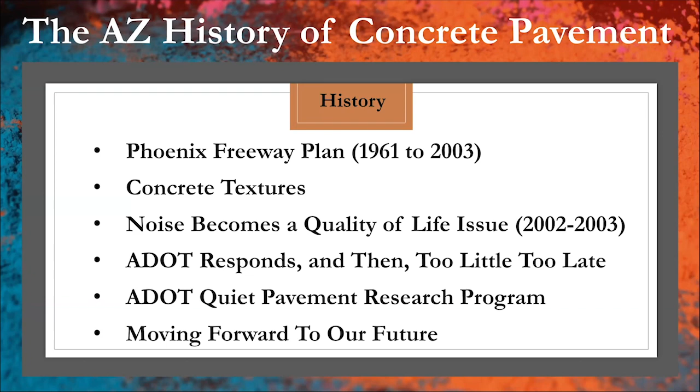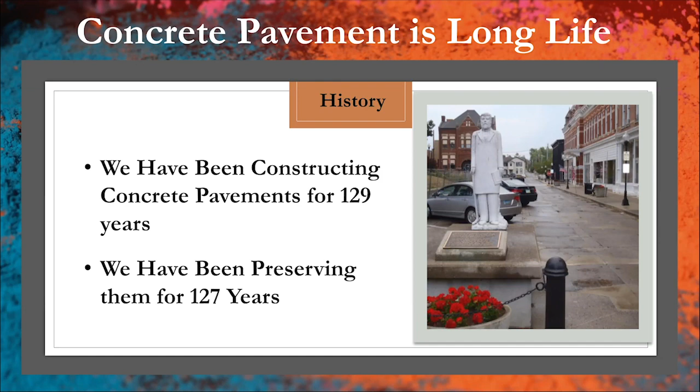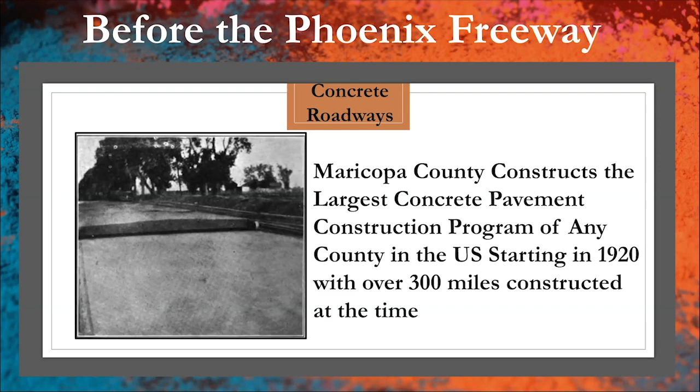Bringing it a little bit closer to home, this hopefully is useful for people to understand our roots. This isn't the Phoenix Freeway system, but Maricopa County started in 1920 with the biggest concrete pavement construction program in the United States. Everybody associates concrete pavement with the Midwest, but it was actually alive and well here in Arizona starting in 1920. Getting closer to the Phoenix Freeway system, this is a slide of the very beginning of it, and it was designed in concrete.

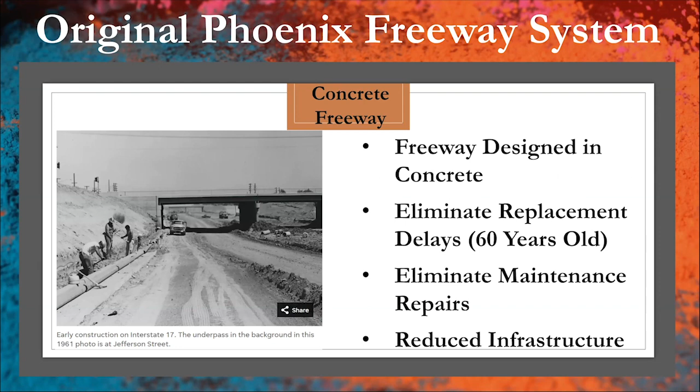The reason for that was to eliminate replacement delays from maintenance, and also to reduce infrastructure, because if you don't have to maintain it, you don't need as much maintenance facilities. The first section that went down that I'm aware of is from 1961, and it's still there. So again, I'm just echoing a little bit about the long life.

The concept is if you impose a signal that's 180 degrees out of phase, it'll cancel the sound. That's actually in modern vehicles today - the high-end vehicles have noise cancellation technology inside the automobile. Also interesting, this technology is coming back from Europe as an innovative technology. But like I said, ADOT first looked at it in 1972.

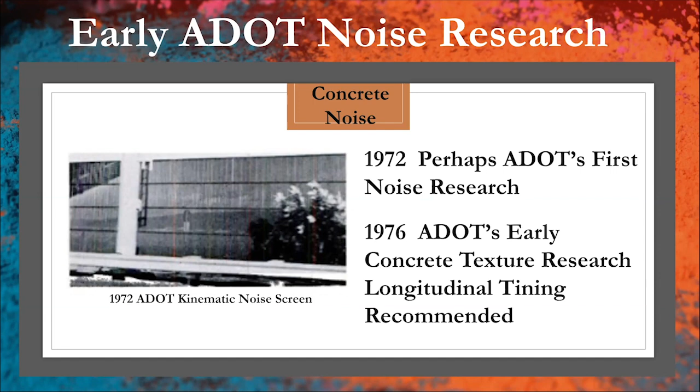The next project was up in the Flagstaff area, I believe on I-17 in 1976, and ADOT evaluated different concrete textures to see which was the best performing. The conclusion of that research was to use longitudinal tining. Unfortunately, that's not what ADOT continued doing - they continued going with transverse tining. What I'm going to show you now is some of the different diamond grinding textures.

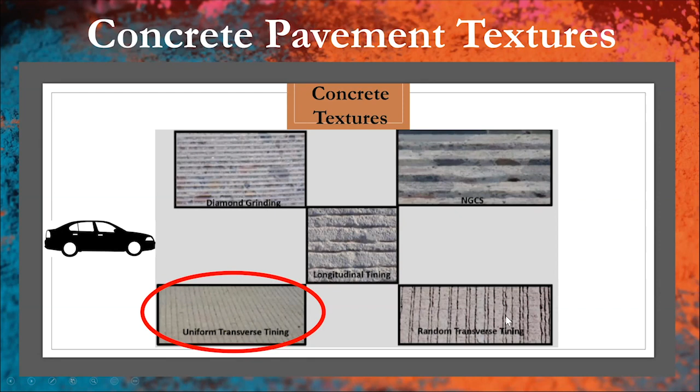This random transverse tining was developed by Marquette University about 2000, and from about 2000 to 2010 it was promoted as the quiet concrete pavement surface. This was a huge mistake. It ended up being the noisiest concrete texture, but at that time nobody realized that.

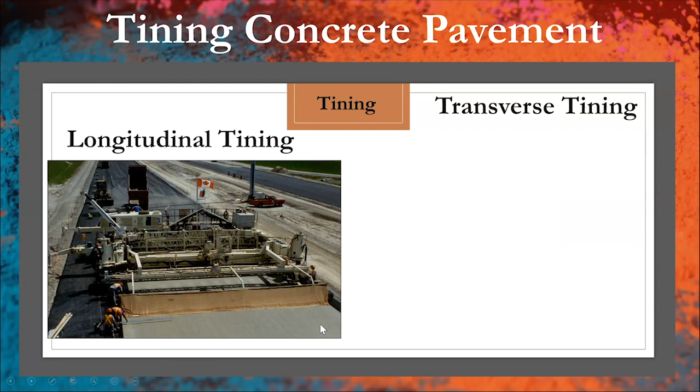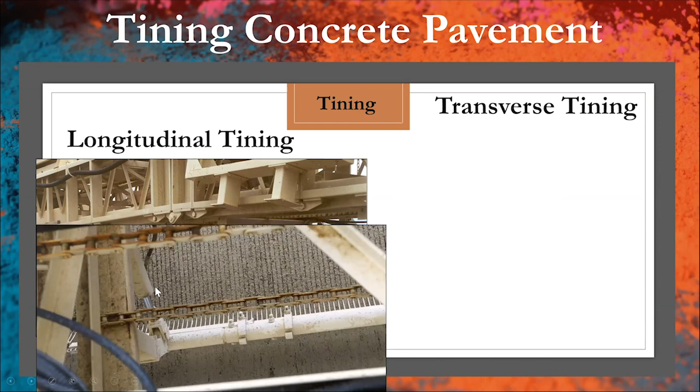So when we say tines, they really are. These are little metal tines, about 1/8 of an inch wide. I'll show you a little close-up of that so you can see each of the tines there. It's really just like taking a rake through the concrete mix. So that's when we say tining, that's really what we're talking about.

The only difference between transverse tining and longitudinal is transverse is 90 degrees to the direction of traffic. And quite frankly, that's what makes it evil. So we'll get into that a little bit more.

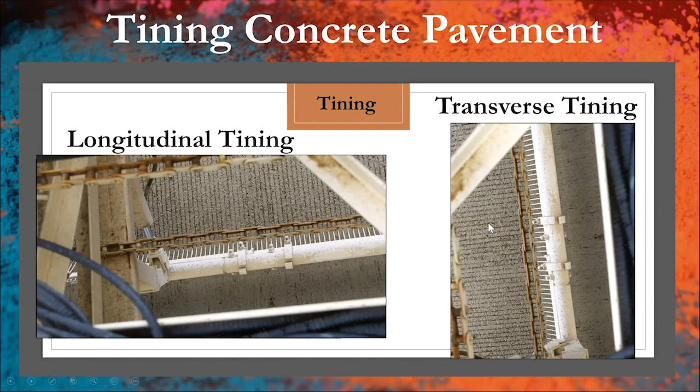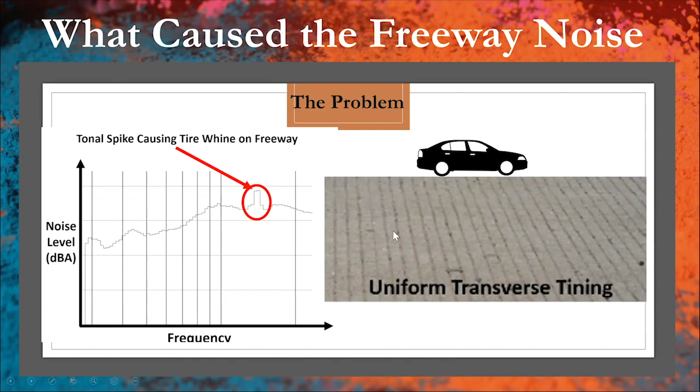This is the whine that you hear in the car that makes it where you can't hear your radio and disturbs you in the backyard. This is all a function of this transverse tining and the spacing and depth of the grooves.

And if you don't accept that, I'd encourage you to go to the internet and look up the Honda Musical Road. In 2008, the Honda Corporation wanted to do a commercial and they made a musical road. They went to Lancaster, California—notice this is an asphalt pavement, not a concrete pavement—but they cut grooves in the roadway. As you drive over this in a Honda Civic at 50 miles an hour, it plays the William Tell Overture or the Lone Ranger theme song. So you could do these grooves in any kind of pavement material and you'll get the same result. It is a function of the transverse grooves.

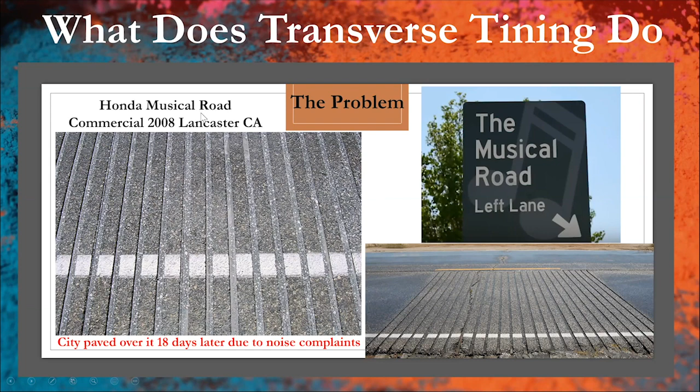Another interesting aspect: 18 days after they placed it, the city paved over it because of noise complaints. So the Honda Corporation had to move out to the boondocks where there were no abutting properties and recreate it for their commercial. You can go to the ad, there's a number of YouTubes on it. There's a married couple that actually does a very good one, and it really sounds like it should.

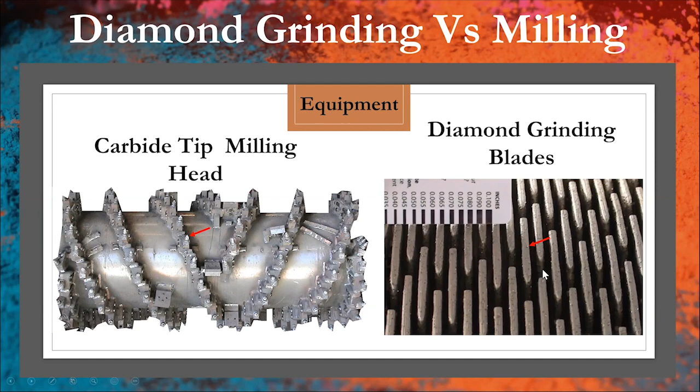So it actually grinds away the material as opposed to chipping it off, and that's the principal difference.

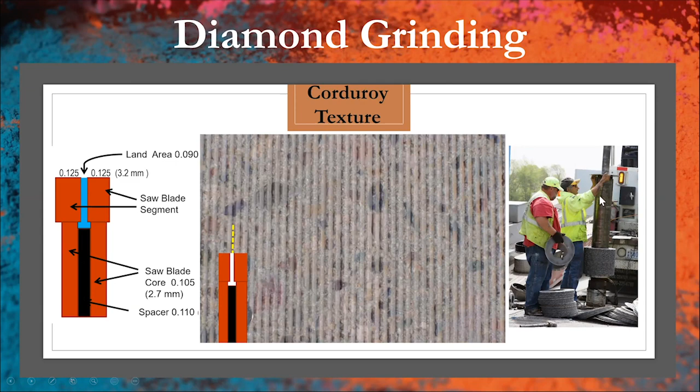But if I may take this same image and bring it back over the corduroy texture so you understand it, where you see these grooves, that's actually the blade. Where you see the ridges, that's a function of the spacer and how wide it is. And this is what a head looks like. They're stacking a cutting blade, a spacer, cutting blade, and that thing will weigh about 5,000 pounds when it's all done.

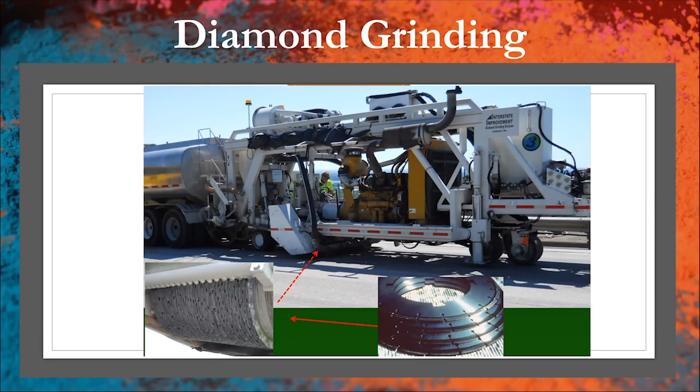So again, blade, spacer, stack it on a head. The head is mounted on the machine. This is a full surface roadway grinder, and you can see the head goes transverse to the direction of travel. It would be traveling to the right out of the page. Since most of the grinding in urban areas is done at night, people don't really get to see what one looks like, so I wanted to make sure you're aware of it.

Taking it back a little closer to home, so you understand what ADOT went through when the noise issue first started surfacing, I tried to give you a little bit of the history on the noise. But at the time, around vintage 2000, there was no standard in the US for how to measure tire pavement noise. Most noise measurements were done with wayside measurements alongside the roadway, but that collects not only tire pavement noise, but also engine noise, exhaust noise, and a lot of other noise. So there was no way to evaluate tire pavement noise. So ADOT actually had to develop equipment to do this, and I'll get into that.

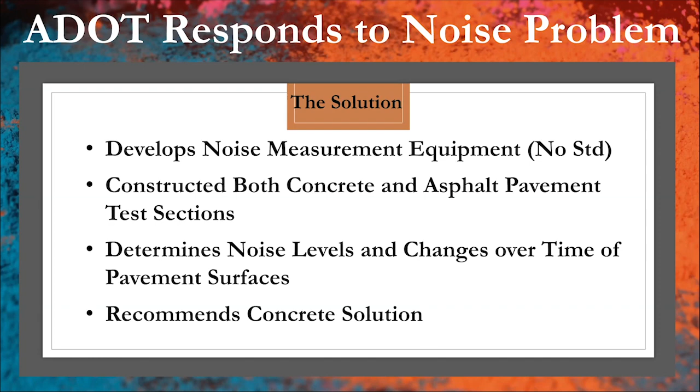They constructed both concrete and asphalt test sections to evaluate them. They determined the noise levels and changes over time for each of those pavement surfaces. After a couple of years, the recommendation was to do longitudinal tining for new construction, and conventional diamond grinding on the existing transverse tining. At that time, all the ongoing concrete projects had change orders initiated to convert from transverse tining to longitudinal tining.

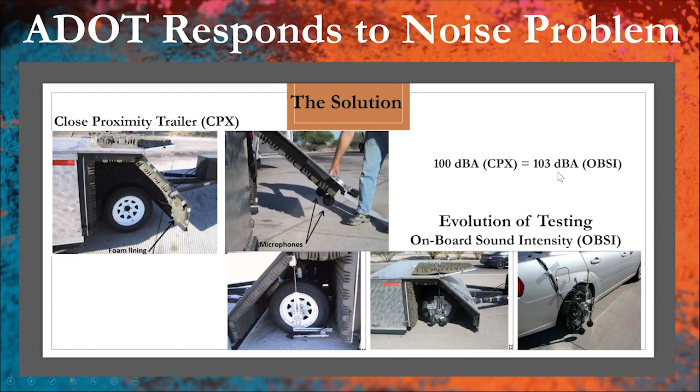So when you see values in the low 90s for noise measurements, it was taken with this device, which is the national standard. So when you're looking at noise measurements, you should be aware of it. Also notice these are much higher than what you would experience alongside the road because they're right down at the tire. Typically, there's about a 30 dB reduction getting to the wayside.

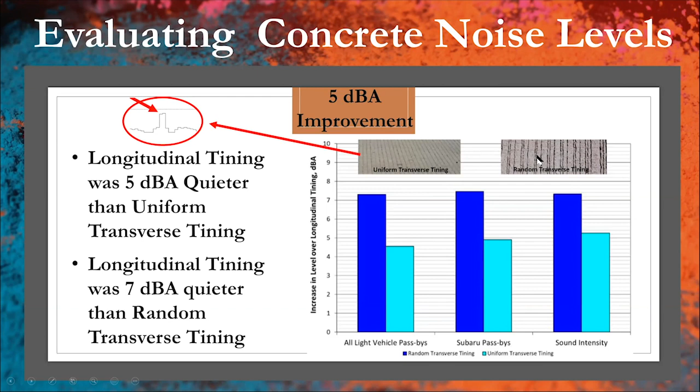The longitudinal tining came out to be the best solution. It was 5 decibels quieter than the transverse tining, and 7 decibels quieter than the random transverse tining. Neither the longitudinal tining nor the random transverse have this tonal spike, but the random transverse tining was still just too loud of a surface.

What you can see is that all the asphalt surfaces increase in noise level over time. The asphalt rubber still outperformed the others.

One of the things that was really important to know is how does that change over time? This is about vintage 2000, 2001. There were only 2 asphalt rubber sections on concrete to be evaluated, down on I-19 in Tucson. When ADOT places asphalt rubber on concrete, it's 1 inch thick, and when they place it on asphalt, it's half an inch thick.

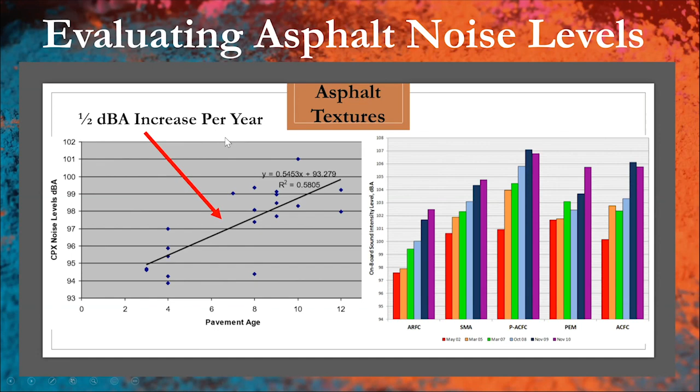So the only way you could generate data was to look in the pavement management system and develop a selection of projects in the same environment on flexible pavements, and all the testing was done on those. You can see it's a shotgun blast, and this is the regression that goes through it. But the important part learned from this exercise is that the asphalt rubber will increase 0.5 decibel per year. When we go over the quiet pavement results later on, remember this number.

So to compare what went on over about a 2 or 3 year period, ADOT created noise measurement equipment. They developed test sections in both asphalt and concrete, looked at the initial and long-term results as long as they could, and their engineering solution was to pick the longitudinal tining for new construction and diamond grinding for the existing surfaces. Unfortunately, it was too little too late. I mentioned we opened up the 3 miles of random transverse tining, and that happened right at the crescendo of the noise complaints and quality of life issues.

So the governor stepped in. Communities were in support of that because they were the ones on the front lines catching a lot of the grief on the noise issue complaints.

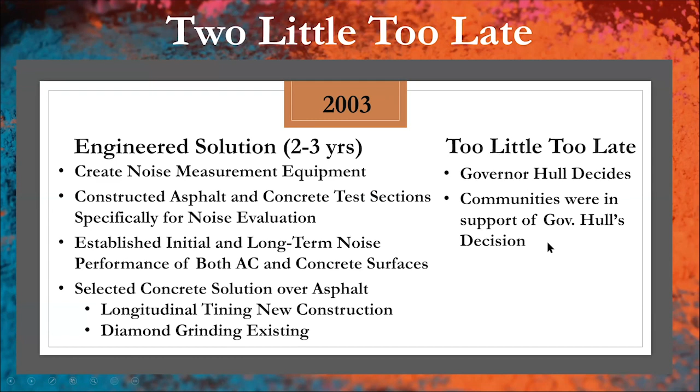So let's take a look at the quiet pavement program. It began in earnest around 2003. It was set up with 3 different types of measurements. There were 6 research locations that looked at both community noise and tire pavement noise. There was also collection done of tire pavement noise at every milepost, and another set that was just neighborhood testing - the idea being if it doesn't make much impact on the neighborhood, we don't really care what it is at tire pavement noise.

The plot on the right is showing the results out of the quiet pavement research program. The blue dots represent the existing uniform transverse tining - the average was about 105 decibels, but what you also see is quite a spread. These are milepost tests. If you were at this location down here as a homeowner, you probably wouldn't worry too much about the uniform transverse tining, but if you were up here, it was chasing you out of your car in your backyard.

The brown line down here shows what the asphalt rubber was at year 1 to 2. The reason it's shown as 1 to 2 is this timeline is in relationship to when the quiet pavement program started, not necessarily the age of the asphalt rubber product. So what you'll see is it's quite a bit lower.

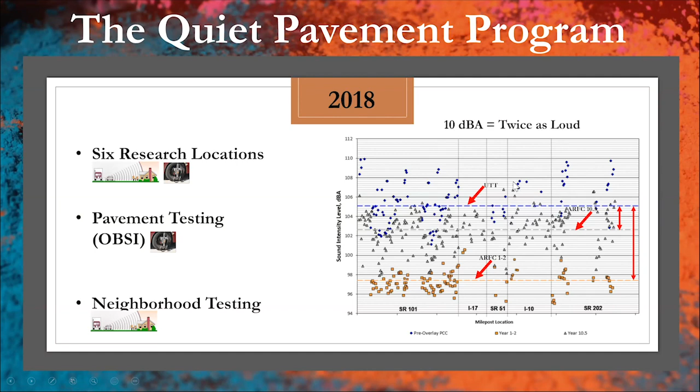There's about a 7 or 8 dB difference here. This also displays less scatter. Then at year 10.5 on the asphalt rubber, that's what the gray average is. So now you can see we're down to about 3 or 4 decibels. There were actually 2 sections that had already been replaced at this time. So again, there's a couple in here that are only 1 or 2 years old, not 10, which is why you're seeing so much scatter. But you can see some of the high points for the 10.5-year-old results are right up there, as loud as the uniform transverse tining.

One of the things I'm trying to relate back to the billion-dollar decision is the true cost of ownership, because that was really never done in that decision. So I've done it myself, and I'm going to present the results for you, but it is something that needs to be done. It's usually done through a life cycle cost analysis.

You evaluate alternatives for either a 30 or 50-year period. I used a 50-year period, and I compared asphalt rubber and the concrete textures. The things you can consider for life cycle costs are initial costs, maintenance, performance over time, environmental impacts, property damage - a whole slew of things you could look at. I looked mostly at the economic and construction side, but I'm going to present some other things just so you know.

If you're not familiar with life cycle analysis, the Bible was actually put out by the FHWA in the mid to late 1990s, but they've recently come out with an update - this is a current date of April of this year. It's a 2-part series, a webinar, and it's available to anybody who wants to look at it. So it'll help you if you're not used to it.

I'm gonna get a drink here, so bear with me.

So things I want to point out - I'm not going to go into the details, but if anybody wants to ask, I'll be glad to share them. For my analysis, like I said, I did a 50-year evaluation.

I used a discount rate of 1.5%. What you'll find for agencies is typically 4% is used, but this number actually came from the OMB, and I would recommend everybody use what OMB - that's the federal government - puts out every year. To give you some idea, the higher this discount rate, the more it favors low initial cost. So it's really important to get what is representative, not some fictitious number from an old manual.

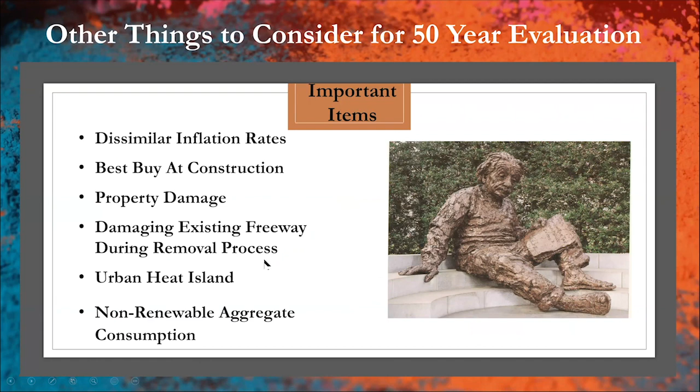Okay, some things that were not considered in my evaluation, but I'm going to run through them really quick because they are important. If you really did a comprehensive job, you need to look at all these things: dissimilar inflation rates, what's the best buy at construction, property damage, damaging the existing freeway during the removal process, urban heat island, and non-renewable aggregate consumption.

So you can see that a real proper analysis would probably have to use dissimilar inflation rates for these products. The other thing is, what's the best buy at construction? When you're talking about building a new concrete pavement versus placing asphalt rubber, it's going to cost about $6.50 a square yard to place the asphalt rubber, and when placing a concrete pavement, it's all done in one lift, about $2.60 a square yard inch.

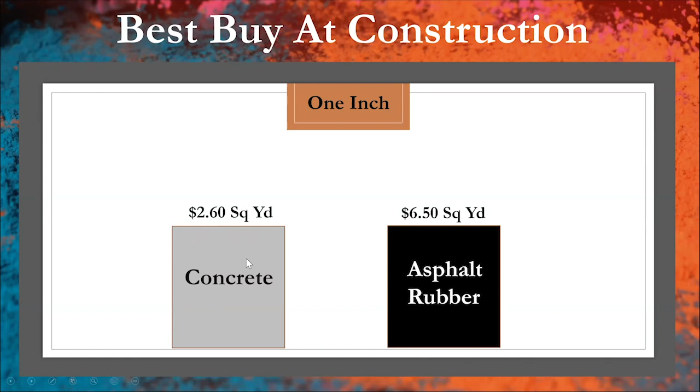So for that same amount of money, you could get a lot more concrete down, which would increase the performance much more. The other thing, and I apologize for the term, but I've had to replace two windshields, so I'm a bit bitter over it, but the property damage issue is a lot bigger number than what most of us realize. I call it black rain, because after it rains and starts to dry out the next day, if you drive your vehicle you hear the little dings of rocks hitting your car, and that's from the raveling that happens.

And this is the culprit, these are the rocks coming out of all these little ravel places. So just a volume estimate, meaning I collected rocks from the side, figured the quantity coming out per unit volume, figured out the unit volume for every one of these joints, and assumed a 1 inch width. It turns out to be 33.5 billion, with a B, rocks that damage windshields and auto paint.

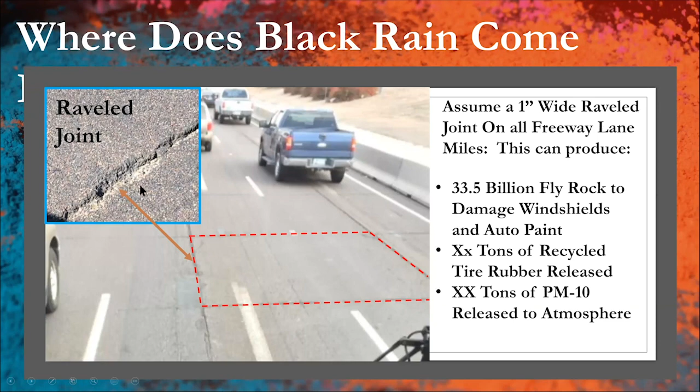I didn't do it, but you could do the same thing for tons of recycled tire rubber released and tons of PM10 released to the atmosphere. This would take a little more thought process to get reasonable numbers, but this one's actually fairly easy.

The other thing I mentioned is the damage to the existing freeway from the removal process of the ARFC. This was never considered at the time when we threw around the idea that it'd be replaced. This is what happens, a worst case scenario, but this section of concrete pavement was reduced 1 inch in thickness. You can see every time a milling machine, remember that milling head I showed you, that's what it looks like, anytime it hits one of these joints, it's just going to ravel the joint.

If you look over here, this is where the milling machine stayed away from the concrete pavement, and you can see the transverse tining texture. But over here is where they lost control and it got down deeper, raveling the transverse joint. You can see it's actually reducing the thickness of the slab itself.

So this was something that happened early on, and I'll tell you that both the milling industry and ADOT have worked very hard to prevent this, and I'll show you some pictures later on about that.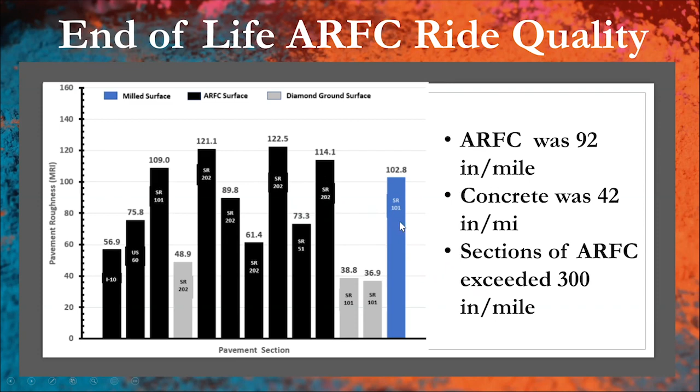More importantly, this average of 92 isn't that bad, but what you need to understand is this is an average for about a mile, and smoothness data is collected in 10th mile intervals. There were 2 sections that exceeded 300 inches per mile, and for an urban freeway, that's unacceptable.

The other thing done by the concrete industry in 2019 was they hired Dr. Paul Donavan, who conducted the Arizona Quiet Pavement Program, to come out and evaluate the sections again, simply because it had been about 4 or 5 years since any testing was done.

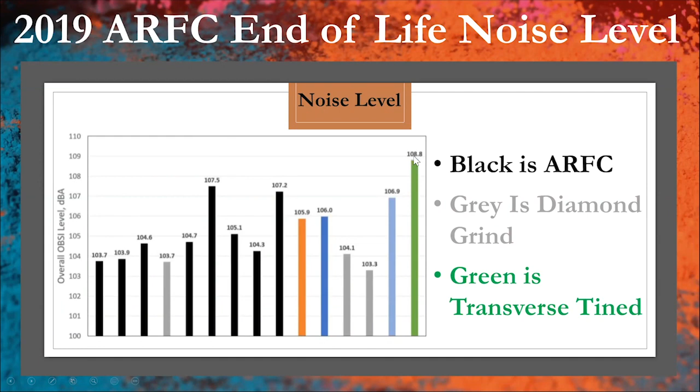The black bars represent the noise levels of the asphalt rubber, the gray the concrete sections. I threw in the green one, which represents transverse tining. Fortunately or unfortunately, the contractor did an excellent job of removing the asphalt rubber, and the transverse tining came back with a vengeance, just like it was when it was original. After it was uncovered, it still had the same issues it did when it was placed.

The other thing I want to mention is urban heat island impacts, and this is the source of this document, titled Streets of Fire. This was done by emergency medical technicians in the late 80s, early 90s. At the time, the practice was laying accident victims on the pavement because they didn't realize it was an issue, but about 21 or 22 people were admitted to the hospital from burn damage. What they found was at 158 degrees, you can burn human skin in 1 second. So the EMT community radically changed their policies on how you administer aid at accidents.

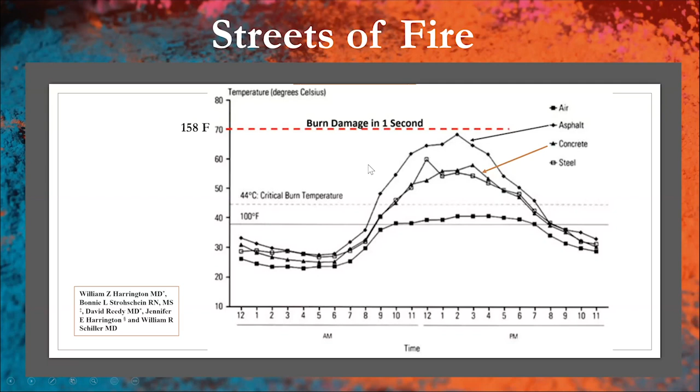This is their data, showing an asphalt surface - this is not asphalt rubber, it's conventional - and this is concrete. You can see in Arizona, the asphalt surfaces get close to that temperature. You'll also hear that asphalt rubber cools it at night, and overall it's better.

This is a picture of a ramp at Hawes Road interchange prior to it opening. This is the asphalt rubber up here, this is the concrete section down here, this is longitudinal tining. I took these photos over a 24-hour period. Again, up here is the asphalt, down here is the concrete, and you can see the asphalt rubber is always hotter than the concrete pavement.

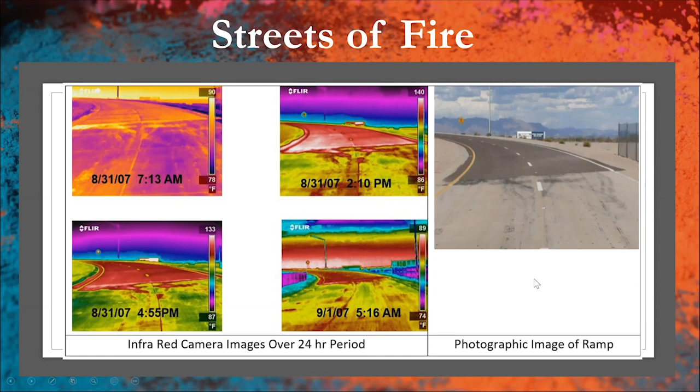So anybody can go out and do this themselves if you have an infrared camera and know a source for one. It's not magic. So one of the other things I'll mention - about a year ago, MIT, Massachusetts Institute of Technology, put out a tech brief on greenhouse gas emissions.

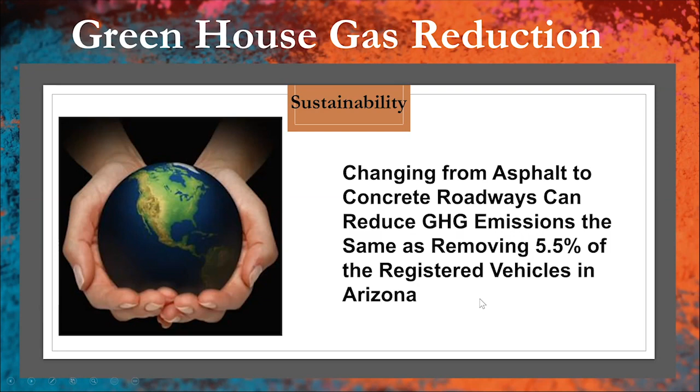They did this for each of the states. The idea was that concrete has a higher albedo, meaning it reflects more light than other surfaces, so the higher the albedo, the less heating that goes on, which results in lower greenhouse gas emissions. For the state of Arizona, if everything was concrete, their data shows the greenhouse gas emissions would be the same as removing 5.5% of registered vehicles from the roadway. Again, these are all things that have never been considered, and could be considered.

But this one's a little more important when we talk about sustainability. Everybody likes the concept of recycling tires, but the issue is we forget that 90% of that 1 inch of asphalt rubber is actually aggregate. So for every 10-year cycle, we're consuming 424,000 tons of non-renewable aggregate, and aggregate is getting harder and harder to acquire. With the 50-year life cycle analysis I presented, there's over 2 million tons of aggregate consumed.

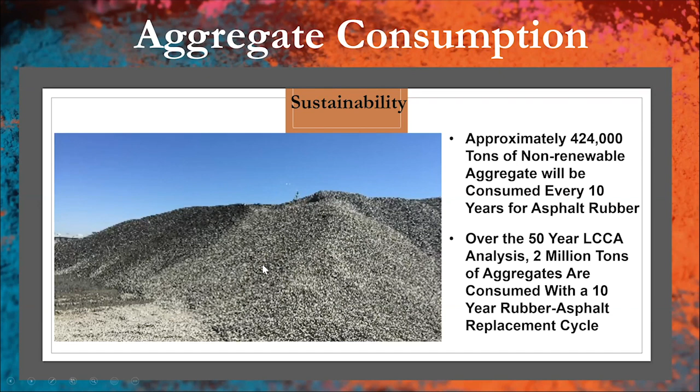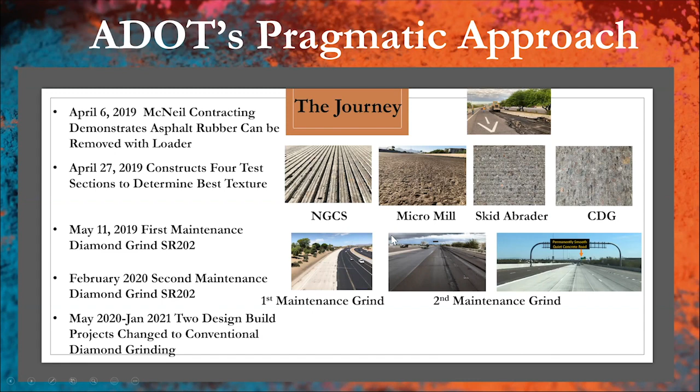Then the next thing was, from May of this year to January of next year, there's 2 design build projects that have flipped from asphalt rubber to conventional grinding. I'll show those here in a little bit, so I'll talk about them then.

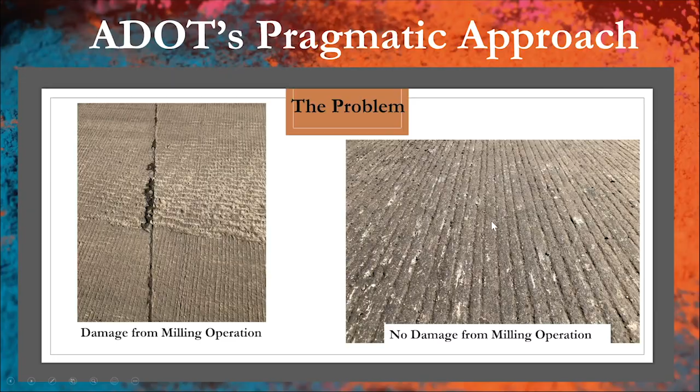I could be wrong - my understanding is 1960 was the first, but this section of pavement actually used metal inserts on the contraction joints every 60 feet. That's important because it was a really bad design, so by the 1980s you had lots of spalling every 60 feet where those were at. This section of freeway should never be uncovered until it's replaced.

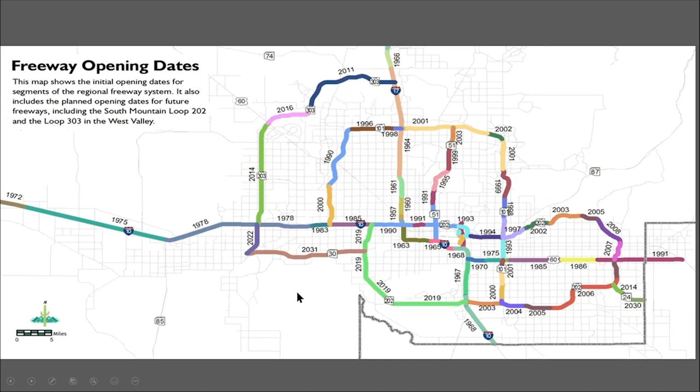And again, I applaud them, because I don't think there's an easy answer to this. The problem is, because the concrete's covered up, there's not good corporate memory of the condition of each of these sections over time. Concrete is not in the ADOT pavement management system, or wasn't historically.

Okay, experience it for yourself. These are the two design build projects that I mentioned. There'll be about 2 million square yards of diamond grinding available by the spring of next year. One of the things the consumer did not have the opportunity to do in 2003, when the governor made the decision, was actually compare the surfaces. There were no sections available. So now you have it, you can drive it for yourself.

And I've tried to list how I see ADOT pursuing this. They're actually in MAG as well, looking for the consumer experiences. What's people's reactions? What do they want? They're also going to be looking at the cost to maintain these surfaces, how they perform over time, and life cycle costing. No surface should get a free pass on any of this.

Notice Arizona is not one of those. But talking just in terms of the federal gas tax, which has not increased since 1993, what you've seen is a decrease in buying power of 30 to 40% in the money. At this same time, you've seen an increase in the wear out of your roads due to increase in volume of traffic, 30 to 50%. In the valley, it's close to 50%.

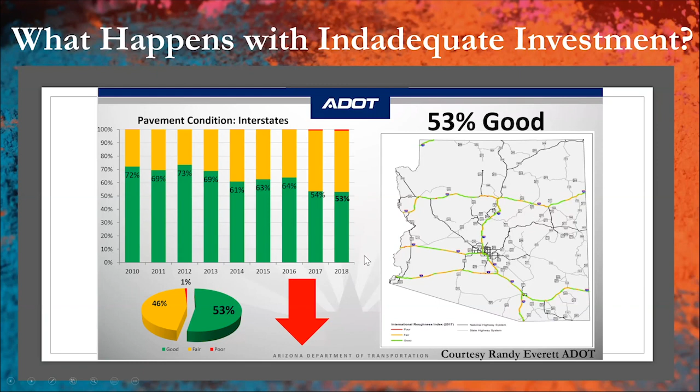This is a slide from the Phoenix Central District, Randy Everett. This is the condition of the interstate, and you can see here's the timeline, and you can see it's going down. I applaud them from the standpoint that they've been able to maintain it in as good a condition as they have, because hopefully the economics I just showed you show how difficult it's got to be for the owners.

For those of you that are aware, the Arizona ASCE just came out with a report card on Arizona roads. They gave it a D+, which I thought was pretty generous, quite frankly. But I wanted to show a couple of quotes from their article: poorly maintained roads cost Arizona drivers $3 billion in extra repairs and operating costs. Similarly, the repair costs attributed to poorly maintained roads and bridges is reported to be more than 3 times what the cost of an increased gas tax would be. So although we may think we're saving money by not having a gas tax, the opposite is actually happening.

And I told you I was going to tell you about the Arizona gas tax. It has not increased since 1991. We have the 5th lowest gas tax in the country.

So moving forward, hopefully I've convinced you that transverse tining causes noise issues in any material. If I haven't, please go look at the Honda Musical Road. You'll see that it is true. It has nothing to do with an asphalt or concrete issue; it has to do with the grooving, the transverse grooving.

Life cycle cost analysis must be done for any major asset. You have to consider all the things that make up the true cost of ownership. Just so you're aware, asphalt rubber is going to require $1 to $2 billion investment over 50 years. Whether you like it or not, that's the cost. Concrete pavement requires less maintenance and can be smooth and quiet. And as I said before, an all-concrete or all-asphalt-rubber solution will not be in the taxpayer's best interest.

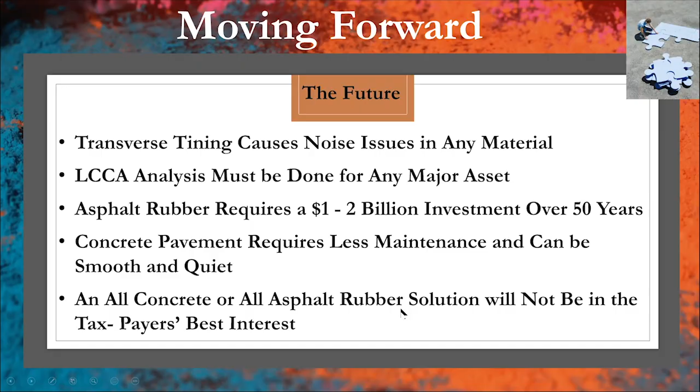So I'm wrapping up here, but this has absolutely nothing to do with what I'm supposed to be talking about. I mentioned I'm a history buff, and there's a reason Arizona is still considered one of the capitals of autonomous vehicles, because it all began here.

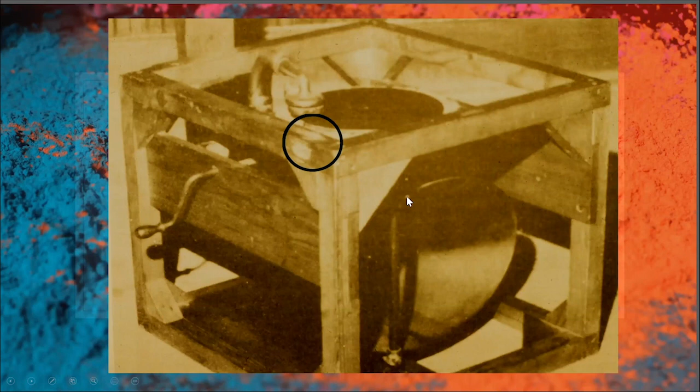So I want to celebrate some of Arizona's successes. This is my no-whining slide. This works better in person because I ask how many people can identify what this is. Since you're not out there, I'll give you the answer before asking for a show of hands: these are actually teeth marks, to be particular, a bite mark.

The reason they're there is that the guy who actually invented the phonograph, Thomas Edison, was mostly deaf. So the way he transmitted sound into his brain was by biting the frame of his phonograph. I use this because, as much as people think life is difficult today, understand it's always been difficult. People have overcome far more difficult situations than what we have.

Looks like we might have a little bit of time for questions, but if not, here's my email. I'll be glad to answer any questions, and if you want more information on where I pulled up any of this information, I'll be glad to do that.